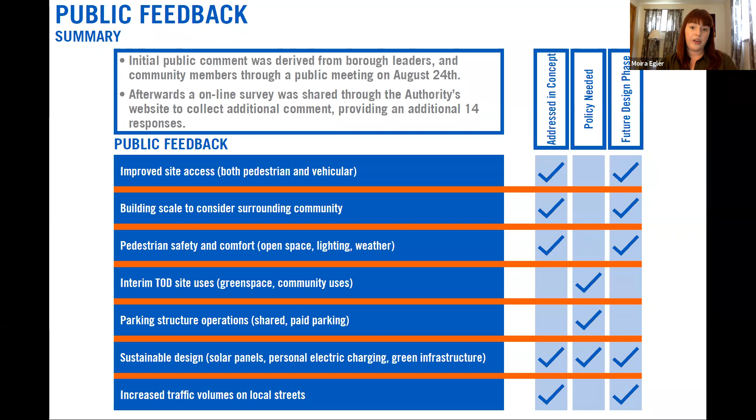So that was kind of a summary of what we heard. And with that, I will pass it back to James to present the concept.

Thanks. So as Moira brought up, the last time we met, we were able to show you 2 different scenarios, and through the public feedback and through the TOD, the TOC at the Port Authority, we were able to determine that scenario 2 was the best option for Carnegie Station.

So here we're highlighting phase 1 of that scenario, which is a standalone garage structure directly adjacent to the borough building, moving the operations of the bus turnaround loop and layover facilities to the back of the site and promoting potential future TOD space to the front at West Main to try to create a continuous street frontage along West Main all the way from the borough building to the station itself.

With this phase, as we call it, phase 1, we do have the garage entry from Veterans Way with an entry and exit point also coming out at Logan Street. At this time, before that, we can take into consideration a potential phase 2, which would be to have access to West Main directly from the 3rd Street access point.

Our garage in this scenario does contain about 430 parking spaces. And then there's an additional 9 spaces of parking for ADA at the drop-off loop that would be held at the rear of the site at Logan Street.

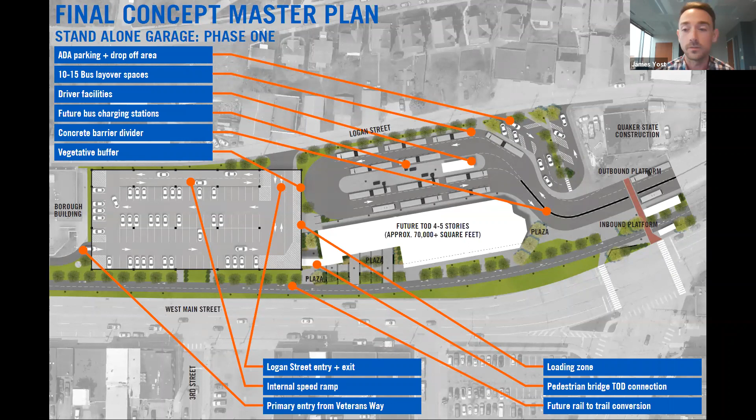Highlighting phase two of this scenario, which is mainly the connection point to the garage, to 3rd Street access and the bus turnaround loop, having that access as well. This provides an additional entry and exit point for all vehicles, so buses and the users of the park and ride. This has minimal infrastructure changes to accomplish this phase.

We would be able to do this through minimal curb enhancements and then mainly striping within the overall garage itself, with the addition of some internal circulation movement changes, highlighted through striping as well as signage and internal gate systems.

As it is designed in the conceptual phase, we have marked the total garage with parking spaces at 10 feet wide by 20 feet. Moving forward, you can actually decrease the width of those and contain more parking, which would be acceptable as low as 8.5 feet by 20-foot spaces.

Future TOD loading zone changes will also have to happen in this area. So the services for the future TOD would just be reoriented as well.

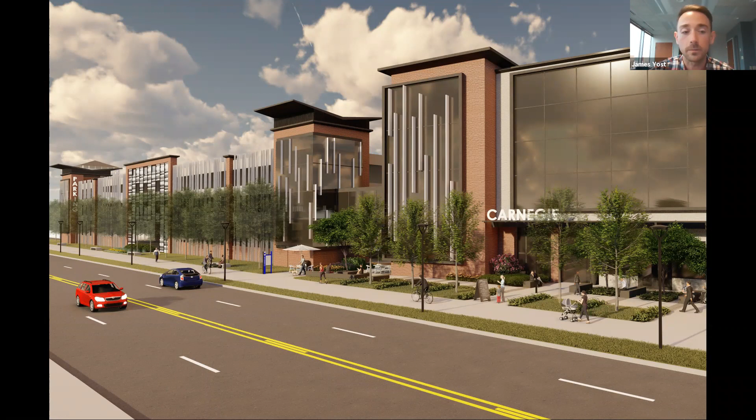View A, looking at the intersection from 2nd, looking back towards the garage area itself, we wanted to try to enhance the overall aesthetic of the garage and potentially the TOD that would be there, highlighting features and textures already existing within Carnegie through brick, while also trying to modernize it by adding curtain walls of glass and steel to help enhance the overall aesthetics of the site. So trying to tie it in as well as modernize the structure itself.

You can also see where the pedestrian bridge would tie in around the second floor of the garage, connecting those two structures and allowing for an amenity for potential future residents that could live there, as well as creating coverage for those using the park and ride garage to get to the station area.

You can also see in the back of the garage itself the top of the existing borough building, highlighting that the garage itself would be shorter than the overall clock tower, which sits a little higher than 60 feet. So the garage itself at its max height would be about 55 feet, so we can see how that would fit and tie in.

While the TOD could potentially go up to 5 stories, hitting that maximum of 60 feet, what we also wanted to highlight in this perspective rendering is the rail to trail conversion that could take place here. A nice wide path for cyclists and pedestrians to walk on, as well as some public space enhancements that we'd like to include within the future TOD, creating that overall aesthetic and placemaking we're looking to have here along West Main.

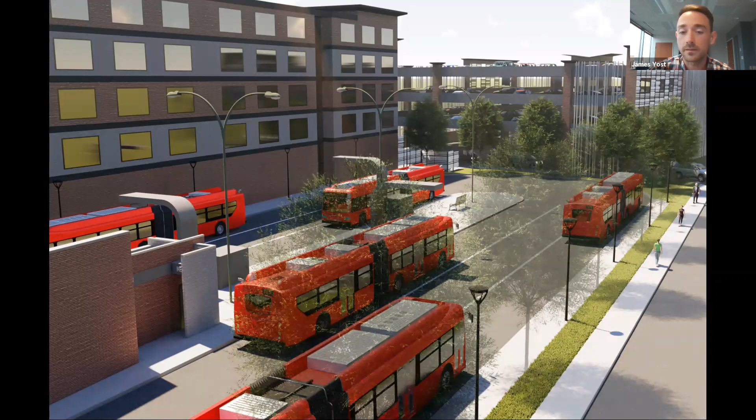Looking at the operations side of things, we're going to look from Logan Street back at the bus loop turnaround and the back end of the garage. What you can see here is that overall loop access that is concealed by the TOD and the garage itself, nicely contained. It's elongated from what is currently out there now to allow for additional buses to use those layover facilities, and also the charging stations and comfort facilities for bus drivers and staff, contained within that internal island. You can see how the borough building still peeks out over top of the garage, highlighting that height difference.

And then just thinking about additional features that would be added, such as lighting and sidewalks that would be improved as part of this project.

So those elements might be adjacent to the garage itself. We have a nice large vegetated buffer that can exist there. We'd be able to fit a decent sized swale that would capture rainwater runoff from the overall site to try and mitigate stormwater. Other activities that might need to happen would be underground detention systems as well, since this is an urban area, to make sure we're containing as much stormwater runoff as possible.

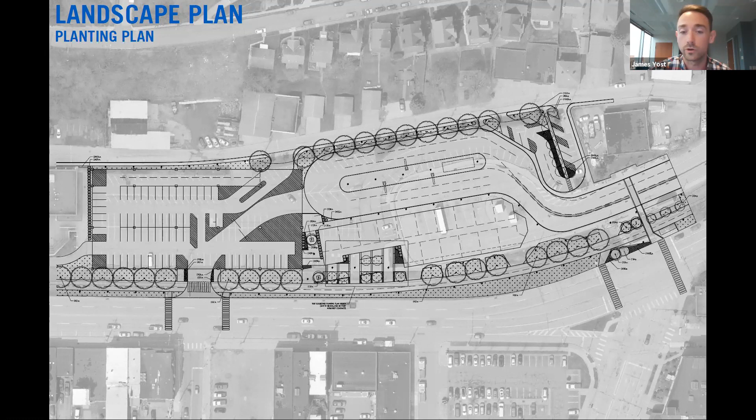Some plantings we wanted to incorporate into the overall site are ones we've done at other stations for this level of master planning to date. We wanted to create aesthetically pleasing but also maintenance-free vegetation within the site. We're looking at street trees and area trees to create nice canopy and shade, as well as shrubs and decorative grasses, while keeping a shorter plant schedule list. We didn't want to add too much, so we're doing more in massings and clumpings to create that overall visual effect, and some lower lying herbaceous plants to add general color and aesthetic appeal to the beds.

Just to summarize all the items within this: Phase 1, the option of the garage before 3rd Street access, including the bus turnaround area where the ADA parking is, we're hitting a total of 434 parking spaces, surpassing the 415 number in our CMAQ grant, which is very positive. Even in Phase 2, when we reduce the amount of parking spaces within the garage by potentially adding that 3rd Street connection, we're down to 416 overall site parking spaces, still surpassing that goal of 415 in the CMAQ grant.

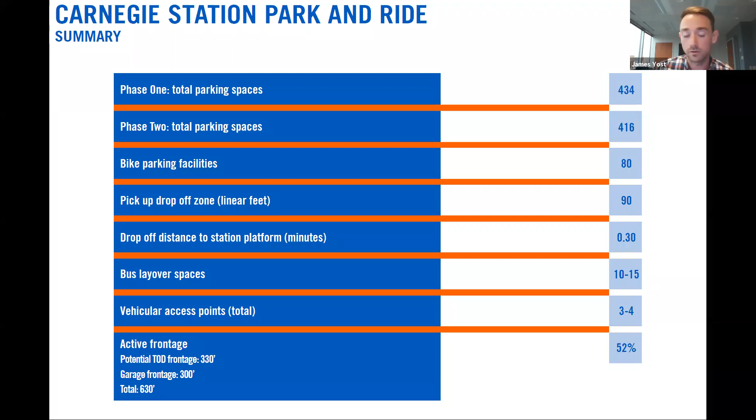And with that, I will pass it off to Rich to go over the statement of cost.

Thanks, James. The cost of the conceptually designed project amounts to about $11.1 million. This considers full build out of both phases 1 and 2 that James had shown, for a basic level of construction with a conventional garage. It does not include, for example, engineering, demolition, or contingencies.

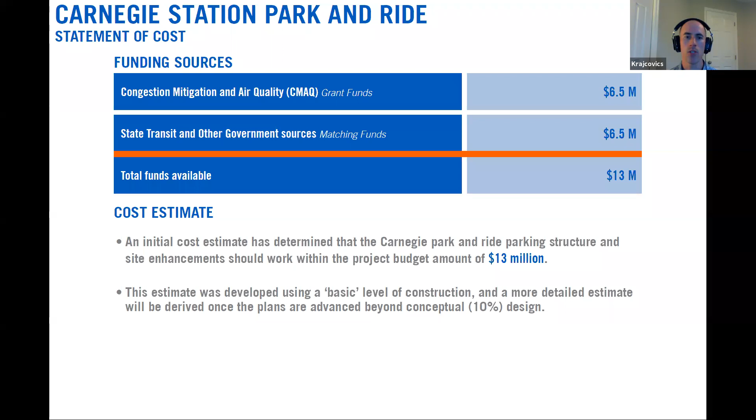The proposed budget for the project includes the $6.5 million CMAQ grant, plus matching funds from state transit and other government sources, totaling $13 million. The remaining $1.9 million does allow for construction of the project. That was our main goal here, to confirm that. However, it does limit the ability to construct any premium features such as architectural facade components, or to accommodate infrastructure needs for possibly converting the garage to another use in the future, such as residential or office space.

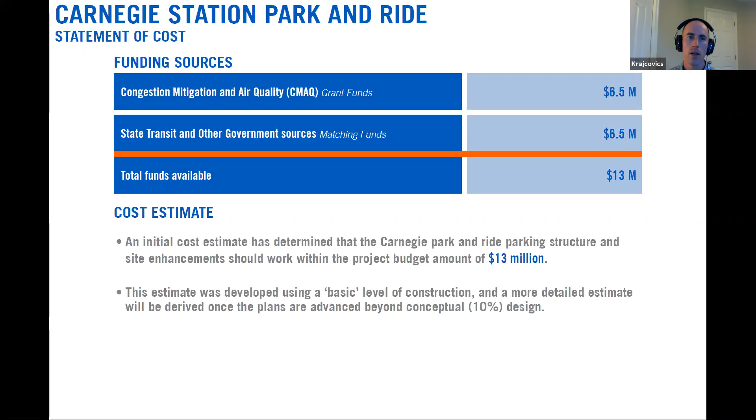So with that, that concludes our presentation today. Thank you all once again for coming out, and we would like to open it up for questions. The instructions are presented here on the screen, and you can use the chat window or raise your hand.

We have two questions in the chat box. The first is about the architectural style of the new garage, saying that the facade doesn't seem to fit very well with the borough's traditional architecture. Heath provides a link to some photos of prominent buildings in Carnegie. I think those are really helpful reference photos to have for the next phase of design. It seems like the brick was kind of the unifying thing with our design, but I can totally understand that comment. So yeah, I think those are great reference images for us to use going forward. Thank you.

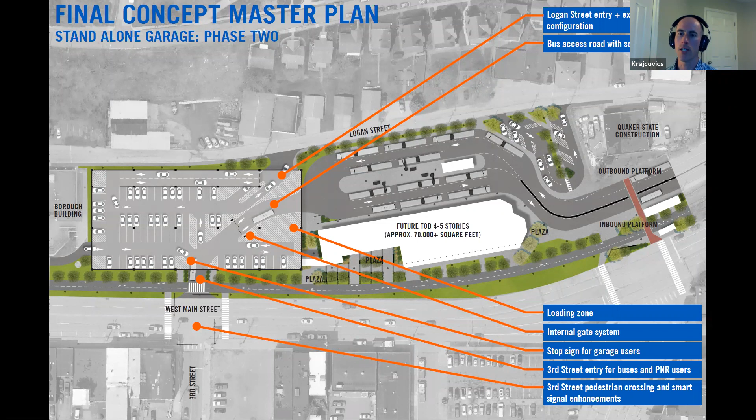However, we do hope to improve connections to the station area platforms from the signalized intersection itself. Jefferson Street is at the far bottom right there. Right now there's a series of switchbacks to access the station for ADA purposes, which makes it a bit of a longer walk. There's a longer path, so we're going to try to evaluate making some grade changes in the area to have a more direct connection for everybody.

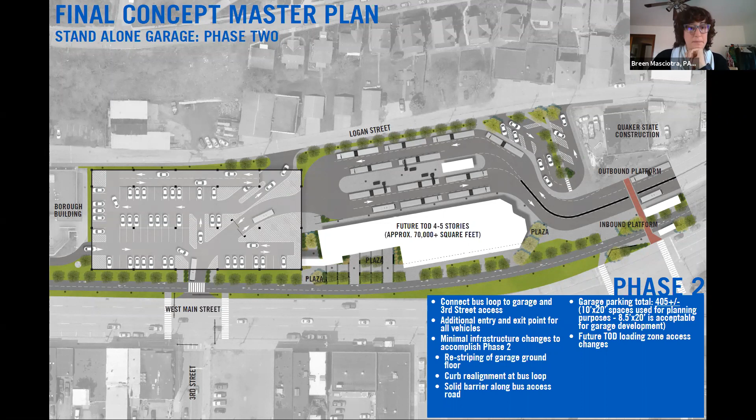Just to be super clear, to reinforce what was said, we would not be removing any access points to the station, only trying to add more as we go with this project.

So I don't see any other questions. Steve did put his contact information in the chat for people interested in finding out more about the Rails to Trails initiative, so contact him if you'd like to get involved or have questions. I'm not seeing any other questions right now, but if anybody has anything else, feel free to raise your hand.

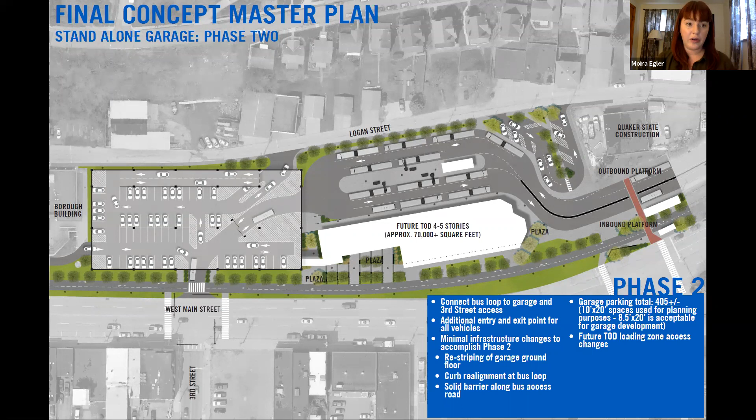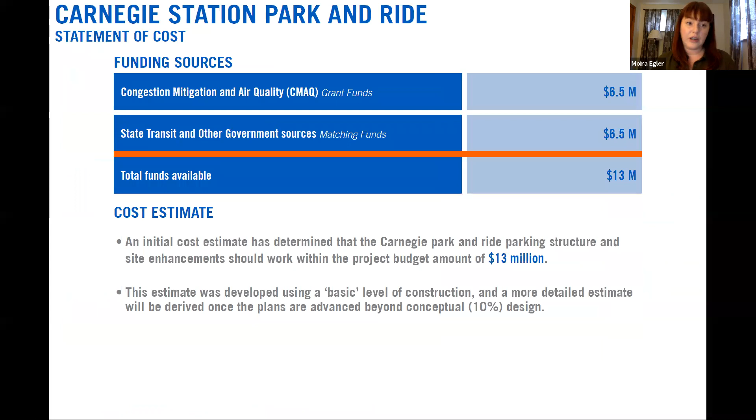I can talk about next steps for the project if there are no other questions. Basically, this final product we're working on will be wrapped up at the end of October, and we'll have our final report then, which we'll of course post on the website. At that point, it will get handed off to engineering to continue the design process.

As Rich noted, we don't expect to really have the funding from the FTA to begin that until about March of 2021 at the very earliest. So the timeline's still pretty uncertain for completion of design and construction, but probably not construction at the very earliest - not until 2023 is what we're being very tentatively told.

So that's our timeline and next steps. We do have another question here: Does PennDOT anticipate increased ridership with the development? I'm not sure if I understand that question.

At this point, PennDOT hasn't done any studies for the development, but as the individual TOD sections are completed, they would likely submit their own traffic study to PennDOT, considering there is a connection to a state road, if not the overall site. There could be short addendums for each use as it goes in, but likely any sort of development that would go on site would submit a report to PennDOT for review.

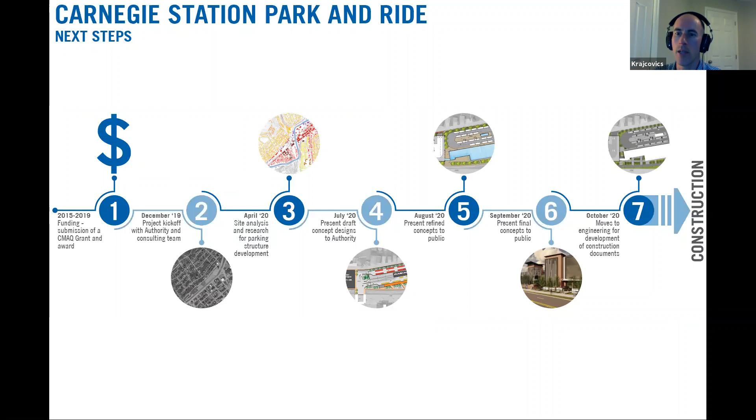Thank you. What will be the exact sources of the matching funds? They will come out of our capital budget, which is primarily state funds matched by local funds. All the state money that we get is required to be matched by local funds that we get from the county. So it will be that typical combination, which funds the majority of our capital budget.